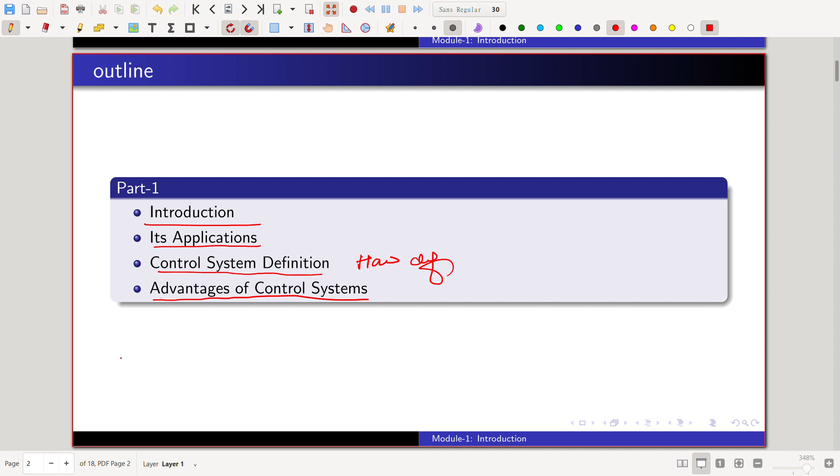So here we can see control systems are an integral part of modern society. There are various applications, so let us understand and touch on each application one by one.

You can see rocket fires - we use control systems to control the launch vehicle. We will discuss this in more detail later. And the space shuttle lift off to Earth orbit - in this also we use the control system, and in splashing cooling water, we also use control systems.

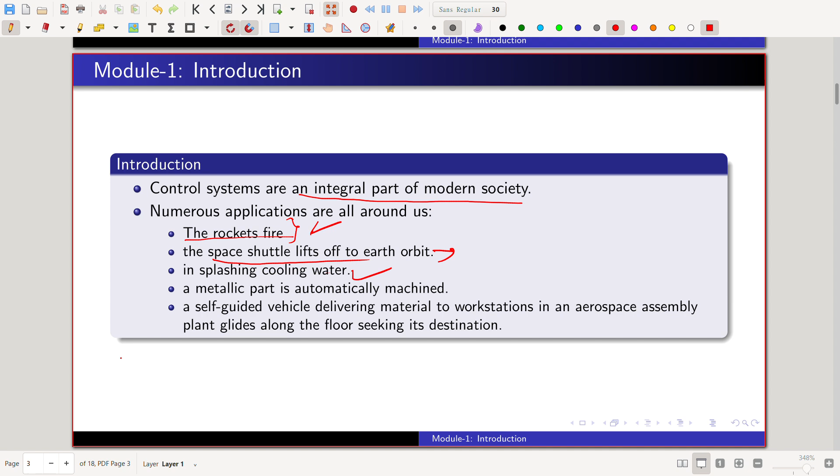A metallic part being automatically machined - this is only possible because we have developed control systems. And self-guided vehicles delivering material to workstations in aerospace assembly plants - this is like an assembly plant, where a self-guided vehicle can deliver material to workstations along the floor, seeking its destination.

We know which floor it would want to reach, so based on that our vehicle can reach its destination. The point is that there are various applications where control systems play an important role, as we saw with rocket fires. Without control systems we cannot control a rocket and follow its trajectory. That's very important, but we will not cover more in this part, I am just touching on this.

This also comes under guidance navigation control systems. We will cover this in another series.

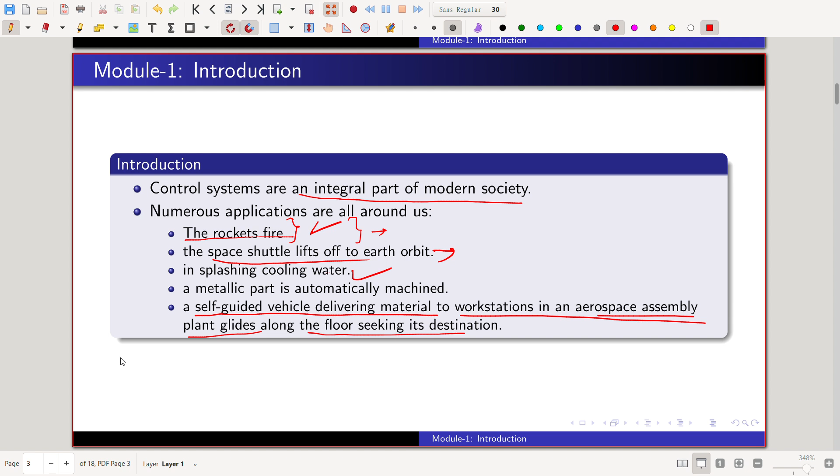So here are just a few examples of automatically controlled systems that we can create. We are not the only creators of automatically controlled systems - if you observe, nature also performs activities in a controlled way. So let us see how such systems also exist in nature.

Within our bodies there are numerous control systems, such as the pancreas, which regulates our blood sugar. In times of fight or flight, our adrenaline increases along with our heart rate, causing more oxygen to be delivered to our cells.

Our eyes follow a moving object to keep it in view. Like if an object is moving, in order to view it, our eyes also follow this moving object. Only then can we view and see the object, right?

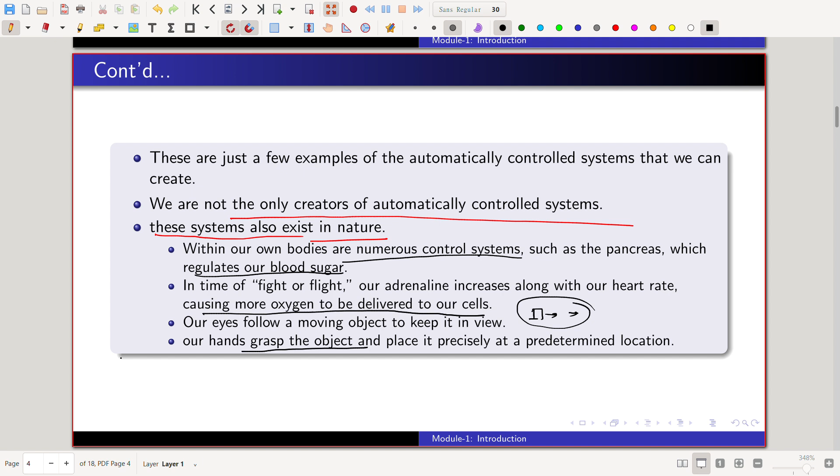And our hands grasp an object and place it precisely at a predetermined location. Whenever we grasp any object and place it precisely in an intended location, this is also part of control, because our hands also work like a robot, we could say.

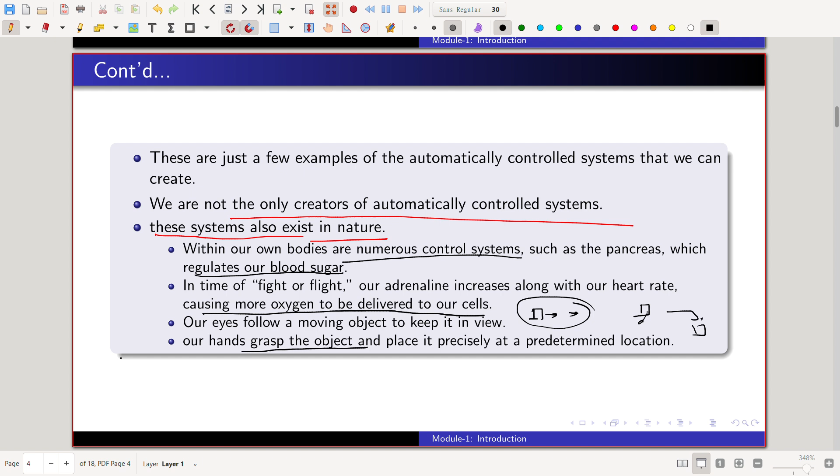So here we are starting the series from examples so that we can build up our intuitive understanding about control systems, and understand the importance and significance of control systems.

So even the non-physical world appears to be automatically regulated. Models have been suggested showing automatic control of student performance - like any model we develop, let us say this is the input and this is the output. This is like a model - we will see what a model is later.

So it tells about the input to the model being a student's available study time, and the output being grade. So the time a student gives to study, and the output is given in terms of grade. The model can be used to predict the time required for grade to rise if a sudden increase in study time is available.

So we develop such a model where we give the input in terms of study time, and the output it will provide in terms of grade. So whenever we increase the study time, it will also impact the grade. That's what we want to understand.

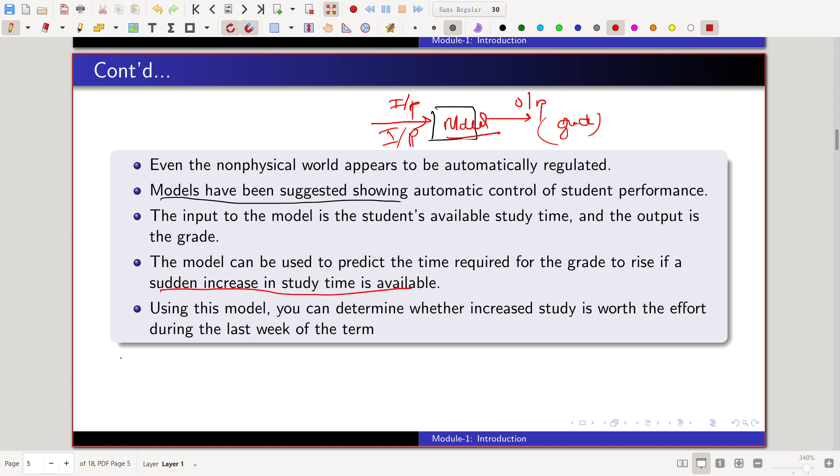So this is also like a case study of a control system. Using this model you can determine whether increased study is worth the effort during the last week of term - we can see how much impact increasing the time has in terms of grade, and how much it's worth.

Okay, so here we understand there are a lot of various applications we can see in daily use. So we started to build up our intuitive understanding. All right, so that's the things.

So here we can understand, if you want to predict, it will still be required the control system model. So model, let us understand what is a model actually. This consists of subsystems, like some mathematics, which will be helpful based on your input and based on your output. It will provide your desired output, and it's helpful in understanding the system performance, how the system behaves over time.

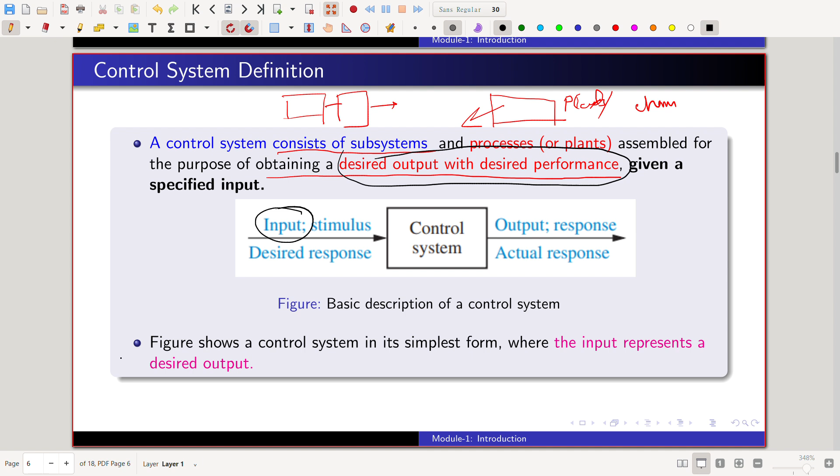And control systems, they consist of interconnected subsystems. Our main focus is that they are assembled for the purpose of obtaining the desired output with desired performance. That's very important to understand, what we want. Actually we want desired output with desired performance. So here we are giving the input. Sometimes we also call whatever desired input we want, the desired response we want, we will give as input. This behaves like a stimulus, we are stimulating the process control system.

So basically if you want to draw this control system, this is the control part, and these are the plant. We will discuss later the types of control systems. So our main focus is that we want to achieve the desired output with desired performance. So we will see what the desired performance is.

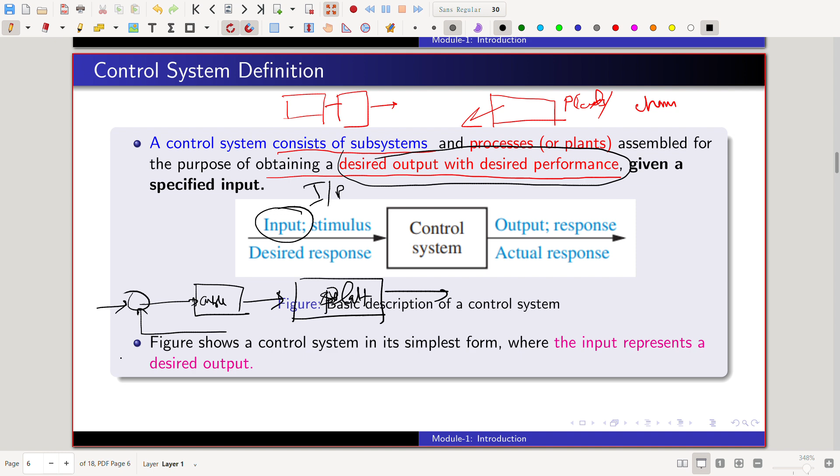So the figure shows the control system in simplest form, where the input represents a desired output. So whatever input we want, we have to give it in terms of input. Whatever desired output we want, we have to provide it in the input. So let us understand this more better with a concept.

One example is the elevator. Nowadays frequently we are using the elevator. If you go to a metro station, there's an elevator there. In the mall also, elevator is there. So let's take an example: when the fourth floor button is pressed on the first floor, we are in the first floor and we want to go to the fourth floor. So how to achieve it?

So you can see in this elevator response, this is like a location, this is like first floor, this is like fourth floor. So elevator location floor you can see here, it will start and behave like that, and try to achieve it. So here you can see there are two responses: one is a transient response and second one is a steady state response.

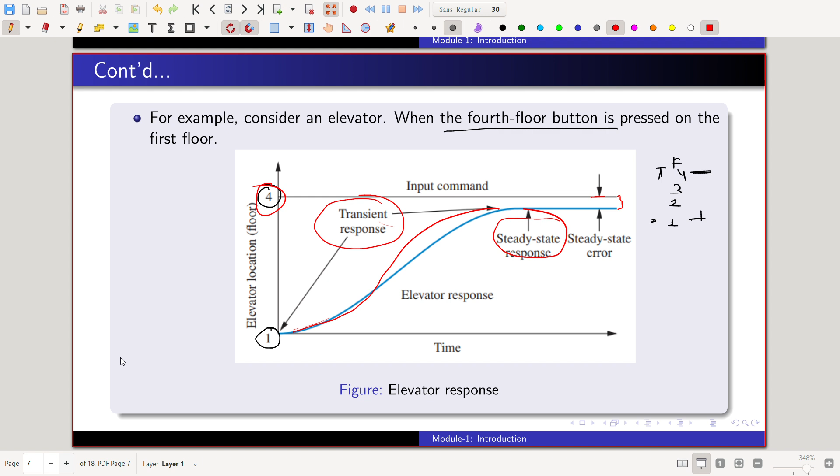So here you can see this transient response. Two things there: one is speed, and how much we are leveling the floor. This is called, in the elevator example, the steady state error - how much far away from our intended floor. So the elevator rises to the fourth floor with a speed and floor leveling accuracy designed for passenger comfort. That's very important. Like the steady state error should be very negligible. This is our desired performance.

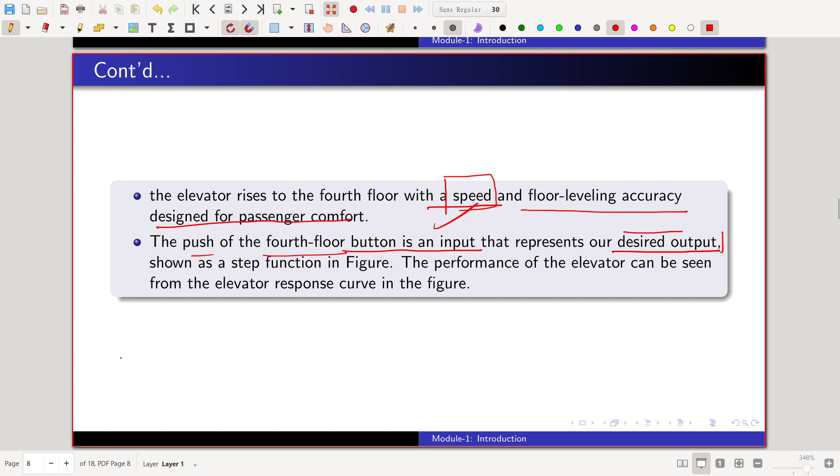And here you can see there are two parameters: desired speed and floor leveling accuracy. So the push of the fourth floor button is an input. This is like input, whenever we give the push to the fourth floor or some other floor, that represents our desired output. So basically, in the input we are giving our desired output - we are feeding our desired output in the input itself.

Okay, so here you can see our previous slides. Input itself we are giving our desired output, and that represents our desired output shown as a step function figure. You can see this like a step response we are giving, the fourth floor.

So we will cover the kinds of response we can give. Performance of elevator can be seen from the elevator response curve in the figure. How performance you can see here, how it's behaving.

So first, initial response, we can say this is called the transient response. And second one is the steady state response.

So for example, consider an elevator. When a fourth floor button is pressed on the first floor, the elevator rises to the fourth floor with a speed and floor leveling accuracy designed for passenger comfort.

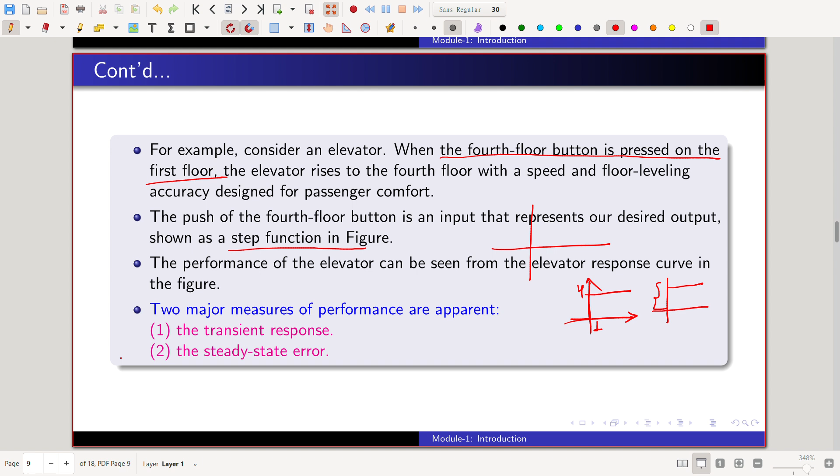So here performance of elevator can be seen in the elevator response curve in the figure. I told you there are two major performances: one is the transient response and second one is the steady state response.

So here in steady state response, basically in our elevator, we can say the steady state error is important. Why? In case of our elevator, for example this is the floor - we have reached your elevator, so it should be negligible error actually.

It should be leveled properly, then only it is comfortable for passenger, right? Comfortable for users. We want to minimize this as much as possible. Whenever we give the step response, it will be behaving like that also. There are various kinds of response of step, so here our main focus is that we have to minimize this error.

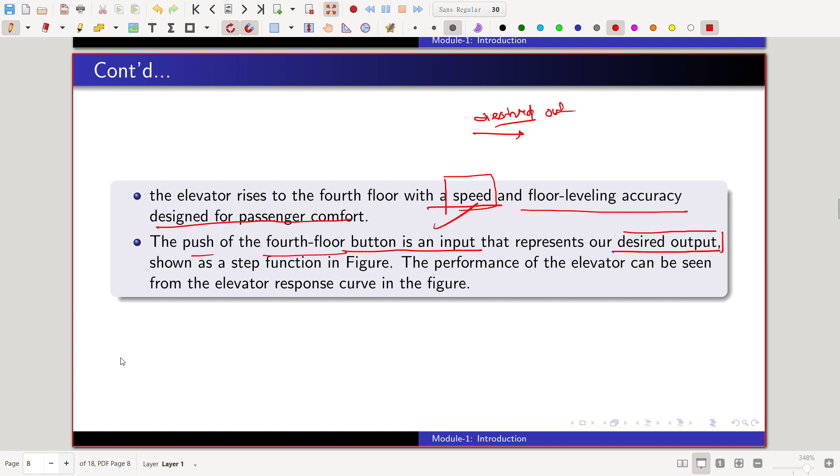And speed we can, it may be less also, there will be no problem. It will take more time, but it's all right. But error we cannot, we should minimize as much as possible. So here we get transient response and steady state response.

So in our example, passenger comfort and passenger patience are dependent upon the transient response. Like if we speed very high, this will not be good for passenger. So we have to give our speed at a level where passenger feels comfort.

And if you give very low speed, it will take more time, so there is a chance passenger doesn't want to go by elevator. So if the response is too fast, passenger comfort is sacrificed - if response is very fast, speed is very high.

Then if it is too slow, the passenger patience is sacrificed. So there are two things - we have to play in between, so that we can achieve the performance, and passengers should also be satisfied.

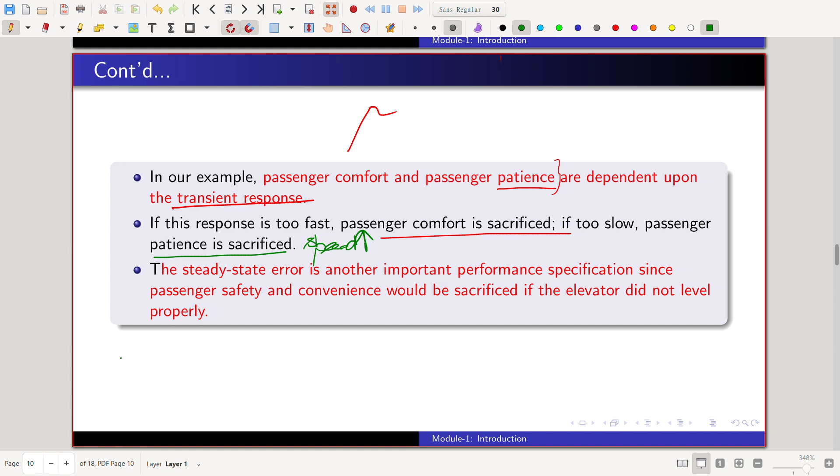And another important thing is steady state error - another important performance specification, since passenger safety and convenience would be sacrificed if the elevator did not level properly. It's very difficult to get down, right? Come from the elevator then, like this floor, and we have reached this - it's very difficult to come from the elevator. So that's also very important.

So speed and steady state error - speed should not be very fast, it should not be very slow.

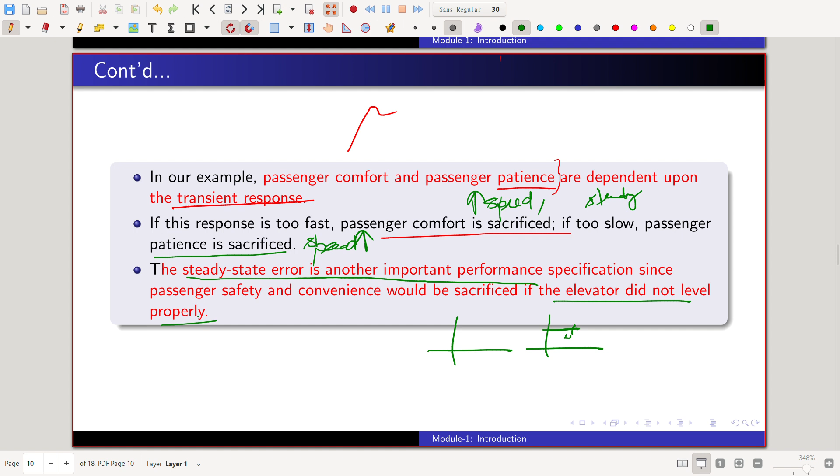So we have understood the control systems, and we have to understand how we can define the control system, and we have built up our understanding through examples. Daily use we can see the application of control systems - a very good application is the elevator.

So here we can see generally there are two types of response: transient response and steady response. In case of elevator application point of view, steady response is very important - we have to minimize the error. So transient response, our speed we can minimize, we can play in between, so that it should not be too slow and too fast - in between we can play with it. So hope we have understood these things.

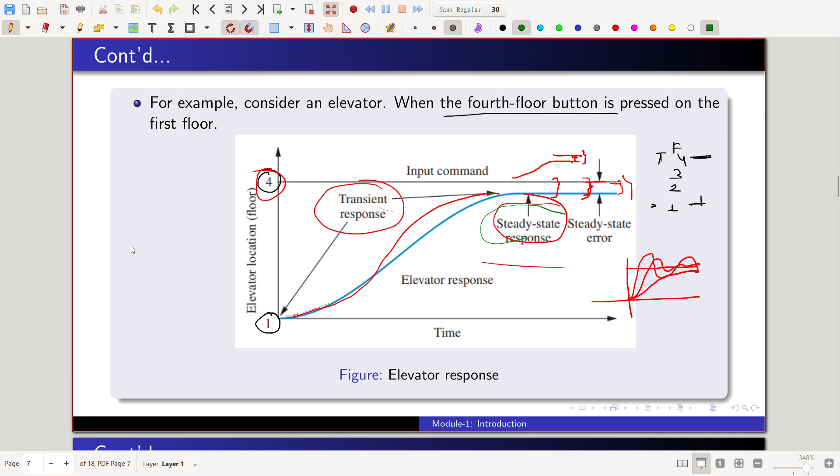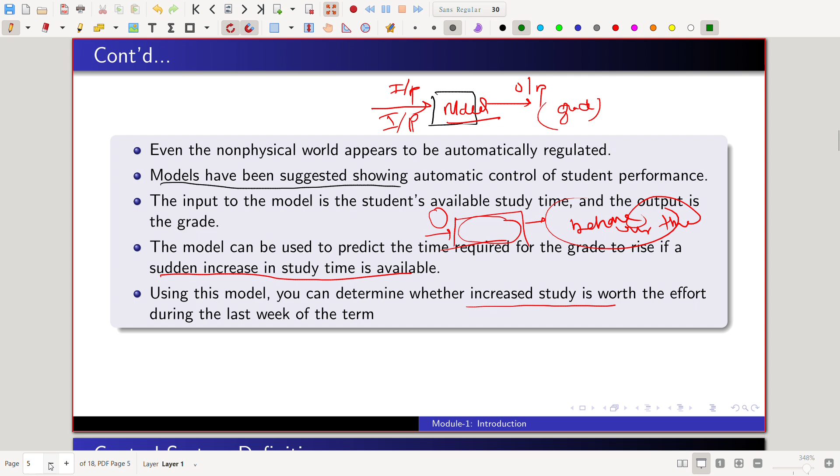That's why we started from the example, so that we can build up our intuitive understanding through control systems. Hope you understood. So that's all.